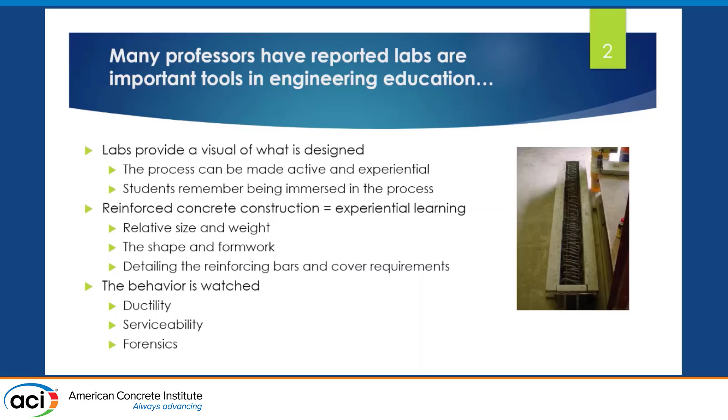But of course, there are some challenges. In particular for us, as you start building these beams, and they're really not that big, they're probably the size of me, a lot of things happen. One, you need a laboratory facility or some way to break it, which requires space. And if you say that word on a college campus, usually you get in trouble asking for space. Also, we need testing equipment, which involves money. So that's another word we don't say on campus.

But if you have those things or are able to acquire them, and in reality, what we'll see a little bit today, if you can get kind of the bare minimum, it works. There are ways to create reaction frames where everything's happening internally. You don't need a strong floor. Where I work now, we don't have a strong floor, and it still can go.

But making concrete beams is labor intensive and time consuming. So there's a balance between what we let students do and what we do and how much time we dedicate to this. And the 3 of us in this study, as we get there, you'll see a variety of approaches, some of which require more time than others. But it really can't be accomplished quickly. It's a multi-class thing. It's not just one day. It's not just an hour.

In general, most of the time, maybe other folks in the room have other experiences, a concrete class doesn't come with a lab. And if you're one that teaches that, you're probably pretty lucky because it's pretty nice and you can really explain things. So for all 3 of us, we weren't teaching a class that had an extra lab section. It was just a 3 credit class, 3 times a week.

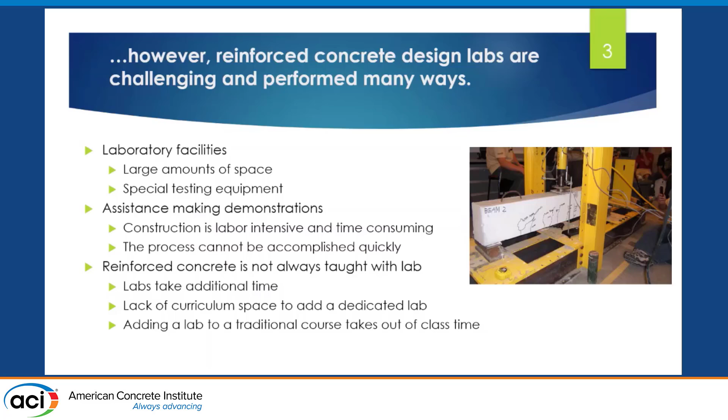So we did do a lot of literature review of seeing what people do breaking beams in class, and you might think in your head, surely there can't be that many papers written about people breaking beams in classrooms because it's not research and it's not private sector. But there's a decent amount. It kind of goes back to West Point and things that happened through military.

But there isn't a universal method. There's not a lot of guidance. Most people do what they think is most impactful. But overall, from the literature at least, the perception is that this is valuable. Every paper that we read demonstrated that. There are different ways that folks did it in the literature.

First and foremost, you can demonstrate this. So you can bring in a little model, maybe it's scaled, you can break it, you can watch it. You can do that on a video, so it's pre-recorded. Or you can just take students to a lab where stuff's already revved up, ready to go. The grad student breaks it, they just watch. And so there's a wide variety of things that have happened. We don't have lab time in our course. That was true in the literature as well.

One of the really wide variety things that we found is just where do you plug students in this process? Should they be designing the beam? Should they just be analyzing something that you give them, like here's a rectangle, it contains these 3 things? Or are you somewhere in the middle of that spectrum, right? Are we starting from scratch or are we giving them everything? And then are we physically breaking these things, or is it more non-destructive and maybe even via computer?

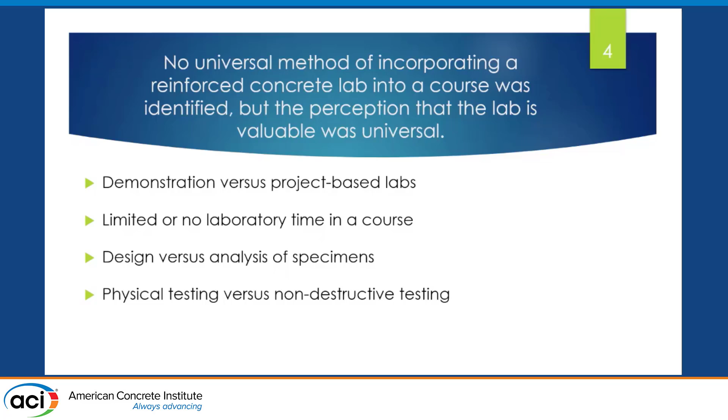So the goals of this study for the three authors here were to somehow compare methods of administering a lab, and we generally all did maybe roughly the same, but there are some pretty important differences. We did compare resource requirements for these methods in relation to adding a lab to a course and compared it to the literature. None of us were ever able to add an extra credit to our class and gain an extra hour.

So pre and post this lab experience for this semester, we did provide some surveys to students, get their perceptions and feedback, and see where they thought the highest impact was. And so were there any other patterns, best practices, or things that we noticed was the last goal?

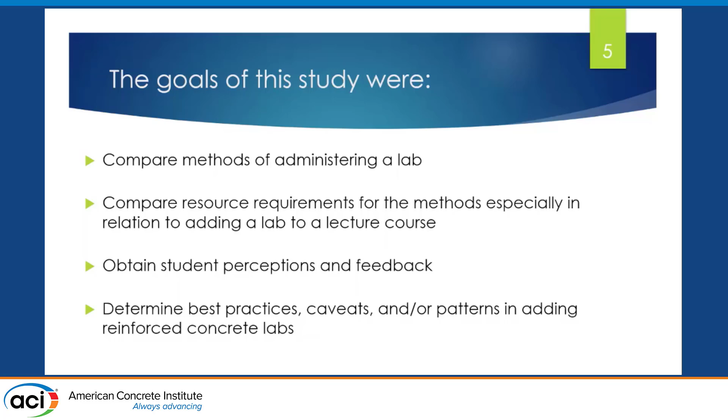My talk is not as fun as that one, it sounds like. So at three different universities, we just called ourselves A, B, and C. When I did it, my name's Ben. This didn't work out that way, but I am B, so it works.

There was three different ways of doing this. It was implemented maybe differently than some folks that have talked, but these are primarily undergrad classes, so we want to get students in their concrete 101 to see and learn a bit more than just sitting in a desk. None of these, as I mentioned a couple times, had a lab section, so this was taking away from typical class periods, and every student in the class was required to participate, so it wasn't optional to go and see and view.

So our class sizes ranged from 15 to 40. All three of us taught 3 times a week. These were group projects, so when we're at 30, 40 students, it's not possible to do small groups, so anywhere between 3 and 8 students. The cool part of it is that the range of testing, and I guess maybe I'm on the low end, but was actually a decent number of beams, anywhere between 4 and 8 of these, 6-foot long, relatively full-scale things. And we were specifically looking at different failure modes, mostly flexure, but also shear.

The places where we varied the most, the three of us, were in how we delivered the lab and then what we asked students to do. So these range the gamut of, you need to come out of class, not during the 3 hours per week, make an appointment in the lab and show up essentially in your own time, which is a big ask of students in particular these days, with student groups and jobs and a lot of folks working.

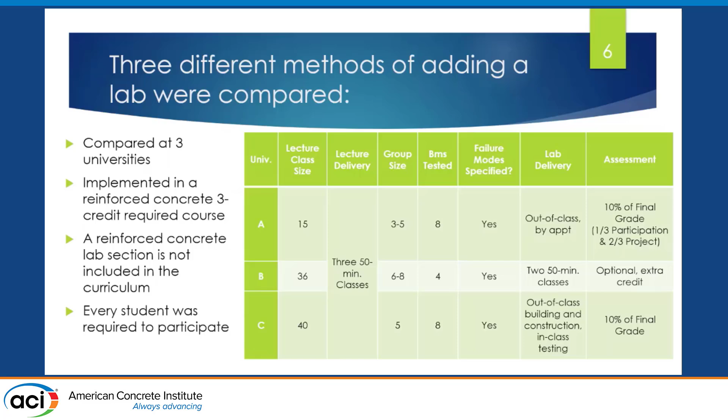So for the first school, the designs of these beams were done by the professor. The students built the beams, and this is one of the ones that was out of class. So you can see a couple pictures here of students. I believe in this case the formwork was also built by the students. They also tested the beams, so the picture on the right is students going through the setup. They're measuring load, there's a load cell in between the actuator there, and they're measuring displacement.

It was an out-of-class thing, but they did have to do a report, so this is determining your grade, so it's a bit of an ask of students. The groups were 3 to 5. They were only responsible for 1 beam, of the 8 beams. But the professor was watching. This is at more of a teaching school, so their time is more dedicated towards teaching rather than research.

And so what they experienced here, and these are some of the details mainly for reference, we're looking at various flexural failure modes, whether it's tension failure, compression failure, or a shear failure, which I think all of us did. The reinforcement is relatively straightforward, number 4 or 5 bars, and then a variety of stirrup spacings to push us towards shear or flexure. So students are aware of this. They need to build their beam to match these specs, which have been set up by the faculty member.

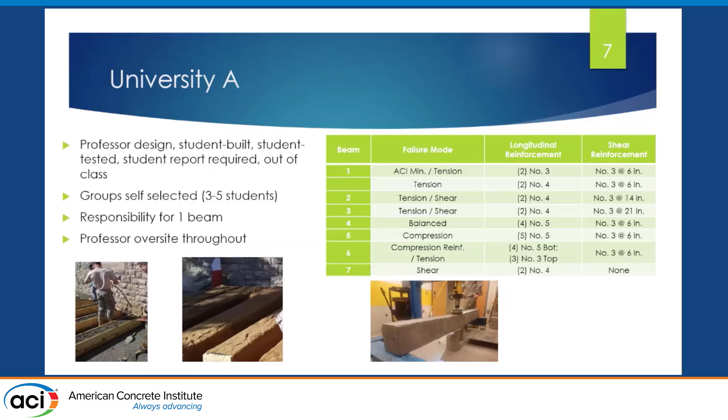In the second one, which is me, we had 4 different beam types to investigate, mostly given by me to the students. I had maybe the least amount of student engagement, meaning I didn't want to take out-of-class time. So students went to the lab during a 1-hour period and assisted in the building. What I tasked the students with specifically was tying the rebar cage, spacing stirrups and bars, putting it into formwork, which eventually led us to owning repeatable metal formwork, something that's super easy and not degrading over time.

And then they leave, having experienced some of the hassle, and come back a month later and watch them being tested. I had the real benefit in the testing portion, one, being in a nice lab with all the hydraulic equipment, but two, having a TA there to help essentially forklift stuff in and out, hit go on the actuator and the hydraulics, and students watch. So, kind of like Dimitri was saying, taking out of the undergraduate hands some of the risk and some of the stuff that is just beyond them.

So I didn't ask students to necessarily report their findings. It was an extra credit thing. But they could analyze, for example, first cracking moments, what's the total deflection, how do I plot load versus deflection? And we sought to look at tension-controlled flexural failures and shear failures.

So for example, for me at least, part of the extra credit was, here's a picture of the failure, there's a ruler showing the compression zone, tell me more about, for example, the flexural strength or something like that, right? And here's some load displacement data, tell me when it first cracked. So just interpreting the data, which is provided from our lab.

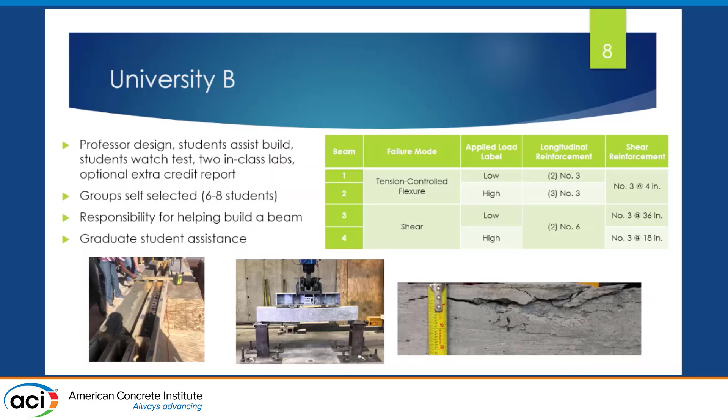And it's not in my talk, but I do know that kind of the next iteration for this faculty member was, hey, we're already doing this kind of variety of shapes. Let's make it a competition, and students tend to thrive on competing and trying to win and beat each other. And so it progressed towards like, is my design efficient? Can I predict things even better? And I'm comparing my group to another group.

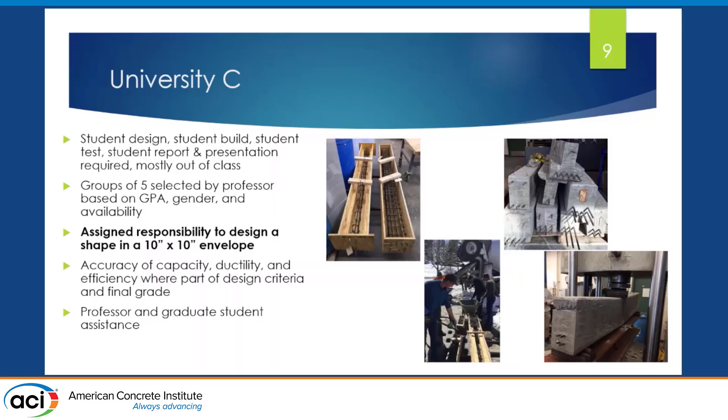There, I guess I highlighted what I said. Like I mentioned, we were asking students to provide their perceptions and feedback as we went, which I think is valuable. It's not just end of the semester, hey, you were terrible, it's too much work. But before and after the experience, we asked students to answer a few questions. One of them was pre and post, what's the most difficult part of constructing the beam? In the beginning, you could probably guess what students might say, they don't really know.

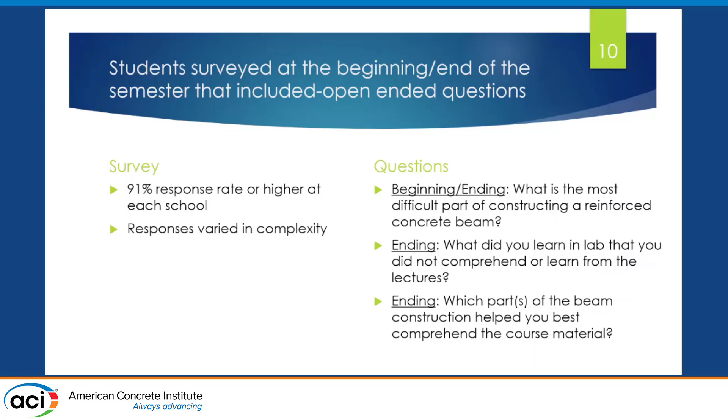At the end, we asked them these 3 questions. So again, what was hardest? What did you learn that you didn't understand from the lecture? So what was maybe perhaps missed or most impactful? And which part of the construction helped you understand the course material? So we had a 91% response rate, so we pretty much hit every student. And I'll go through some of the results here relatively quickly.

So what is the most difficult part of constructing the beam? And I think for me at least, on the left side over there, the initial results are kind of all over the place, even though they're here in a tabular form. I would have expected that 90% say, I don't know, this is the survey, I'm done with it, great. But students were guessing, maybe it's the rebar, maybe it's the formwork, maybe it's the curing and waiting. So it was kind of all over the place. I don't know what I'm doing, I don't know what to expect.

After the lab experience, that number went way down, and maybe because of the hands-on, most students said, well, positioning the rebar is not something I thought was complicated. Like, in a drawing form, it's just magically there. Somehow it looks like a rectangle and they're spaced nicely. It turns out it's not that way at all.

And then, as you would probably guess, the one university that did incorporate design most drastically had a high response there. This is actually fairly complicated. Turns out my predictions aren't close, right? I'm conservative, hopefully, but this is challenging. So we did see design at the other universities.

Formwork and mixing were not challenging, apparently. They were relatively straightforward. I guess I should say, at least in my case, the concrete came in a ready mix truck and we dumped it in. Actually, I think that was the case at all three. We didn't make the concrete, we bought it.

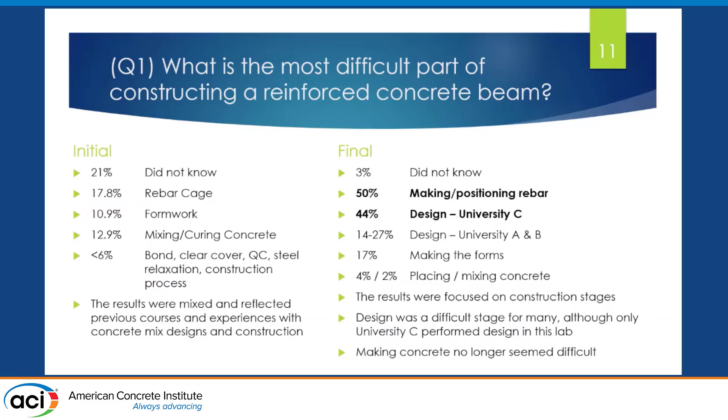So it turns out that a lot of the results were on construction, which in my personal opinion is a good thing for students to see, because if you're going into design, don't forget that this can be challenging, and you want to think about construction as well. Design was difficult for many, but a lot of them at University C here were really doing design. The actual concrete, though, after this didn't seem challenging anymore. So what did you learn in the lab that you didn't comprehend from the course or the lectures?

The results were a bit all over the place, but as you might expect, construction is challenging, or something I didn't understand, because we don't really cover that in design classes. Maybe some folks do in the CM side of a concrete class or something. It really helped here zoom in on what is a failure mode. Do you see ductility before things fail? Do you not? We all tell students that shear cracks happen at an angle and it's 45 degrees, and they get lost, but actually seeing it, they understand that makes sense.

There are some time-dependent processes that we didn't do that you could show with videos, like if you wanted to see cracking over the course of the 1-hour test and you recorded it, you could slow it down and watch where they go. We weren't asking students to get in there and look and measure and trace with a permanent marker or anything. So some of those could be in the classroom. Similar with pictures, if you wanted to highlight these. We did have, in my opinion, a relatively high number, 14%, that said this wasn't really useful. It's probably because they were asked to dedicate some time out of class and got frustrated and didn't want to be spending more than 3 credit hours per week doing this project.

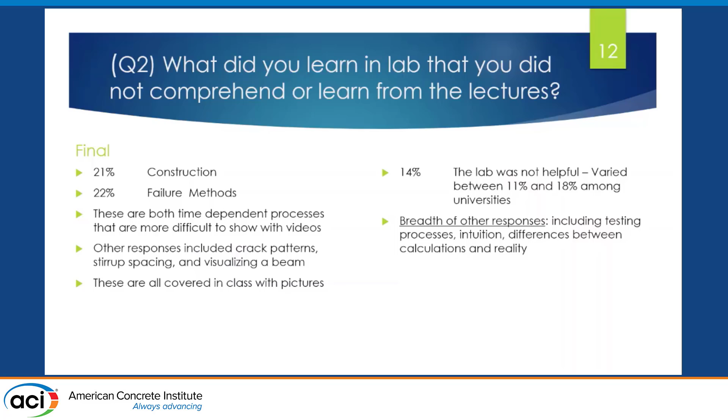Last but not least, question of student perceptions. What helped you best comprehend the course material? So in general, it was construction. It was thinking about how do these beams go together, connecting the dots on longitudinal reinforcement and how it's connected to vertical shear reinforcement or something like that. That was pretty ubiquitous across all the places. Again, design was important, particularly at University C, where they did a lot of design.

And then here's the same, maybe 10% of the folks that just didn't really care for the lab. Maybe structures isn't their thing. At least in my university, when I taught here, this was a required class, so we are pulling in environmental students and water students and asking them to do something that they perhaps care less about. But in all these, the 3-dimensional topics that were harder to demonstrate in the class really show through the results.

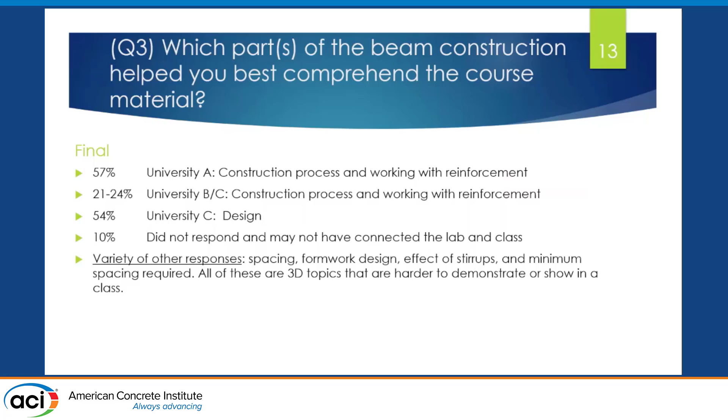So what were some of the things that we took out of this? Students seemed to enjoy the hands-on construction process. I think we would have all guessed that. They really liked seeing the failure modes and the cracking. The out-of-class work was not universally appreciated. That's probably something all of you could have told me. But the lab reports can be time-consuming.

But across all three, we did learn things. Those who did an optional assignment or did an assignment gained a deeper understanding. It was a significant effort for the students, particularly those that were out of class. For University C, where they were doing design, the faculty made sure that there were interim checkpoints, so it's not just design away for 2 months and hope you land on something that works. So there's a bit more involvement from the faculty.

So in conclusion, the labs took a significant amount of material and time. This was ubiquitous in the literature, and for us, I have seen it done on a bare minimum. It's definitely possible. The out-of-class time's got to be reasonable. I think we were flirting on the edge of that, and it worked out. The in-class time, which is what I did, with only 2 hours, you really got to be efficient, because I want students to focus on, for example, the failure mode, and not the cool forklift driving around.

A design component obviously pushes students to learn at a higher level. This is the dream. Everything is design, and we can iterate many times, so kudos to you, Garrett, for iterating. But the construction, the detailing, the 3-dimensional rebar cages, really were key in these experiences for our students.